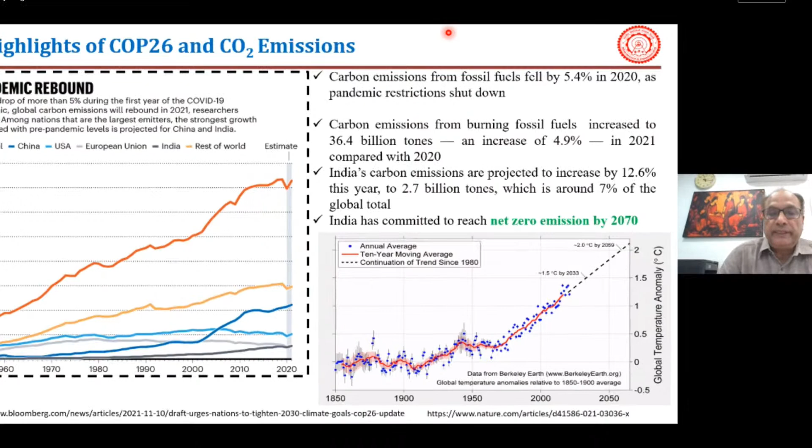So with some background, what Mr. Ashu already explained about these things - what happened in COP26 and then the COVID pandemic, and gradually the CO2 concentration, which is now around 410 ppm in the environment, makes the overall system very challenging. It has already been said that by 2070 it should be zero carbon. So how to do that? That's very challenging. And if you look at the data, the carbon emission from all these burning fossil fuels has increased to 36.4 billion tons, which is around 4.9% increase in 2021 compared to 2020.

So that's what the COVID impact has been, you can see there is a dip and then again a continuous increase in carbon dioxide in the environment.

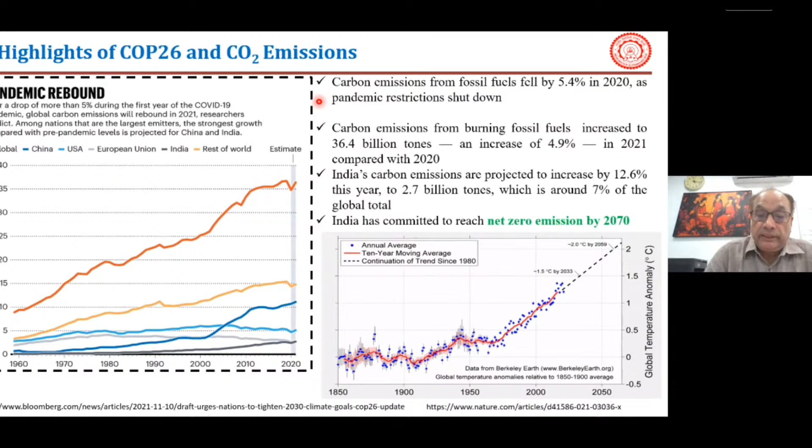If you look at India's carbon emissions, that is also projected to increase by 12.6% this year, reaching a level of 2.7 billion tons, which is approximately 7% of the global total. And India has already committed to net zero emissions by 2070.

And you see the consequence of the increase in carbon dioxide in the environment - the temperature is rising, and because of this there are several other complications that come up.

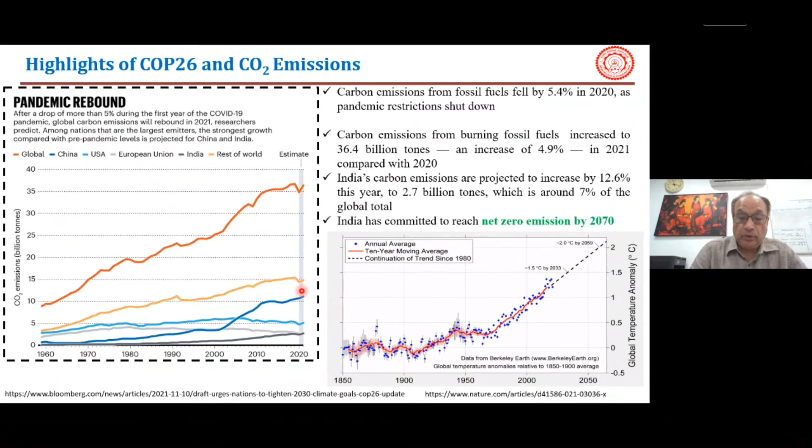So with this, there is a need to look at the non-carbon fuel based economy, and that's why we are talking about the hydrogen economy. I'll give a couple of glimpses of this - how this can be done and what are the challenges, which were the questions Dr. Ashu has already raised in the beginning of his introductory remarks.

So you see that the fossil fuel demand, and when you look at the energy demand, it is increasing continuously, and most of this demand, say in India, 90% of it is from crude oil or natural gas. And the temperature is increasing because of this carbon dioxide in the environment - approximately 1.5 degrees, which is expected to increase by 2033. So that's again a big challenge.

So therefore everybody is talking about how to reduce this carbon fuel. Hydrogen could be one of the promising fuels, or energy carrier, in future.

Whether it is the fertilizer industry, refinery, petrochemicals, or maybe the transport sector, hydrogen could play a major role, and that's why the hydrogen-based economy is coming up in a big way, whether it's from different kinds of feedstock - biomass, coal, natural gas, or some other sources. But there's a need.

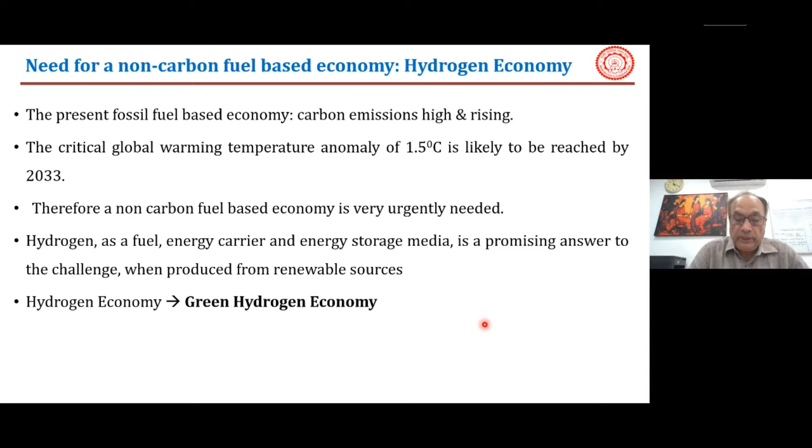But the future is again not in terms of grey hydrogen, what Dr. Asutosh has raised - it should be a kind of green hydrogen. So now the challenges are much more stringent in order to make this possible.

So again, you see the demand of hydrogen - because it's one of the fuels widely used in refineries, petrochemicals, iron and steel, chemicals - so everywhere you see the demand is increasing continuously. So it's not a linear growth of hydrogen demand, but rather exponential.

And this is not including the transport sector. When you look at the application of hydrogen in the transport sector, this is going to be much higher. Indian demand in terms of these chemicals is around 6 million tons in 2020, mainly for methanol, petro refining and ammonia.

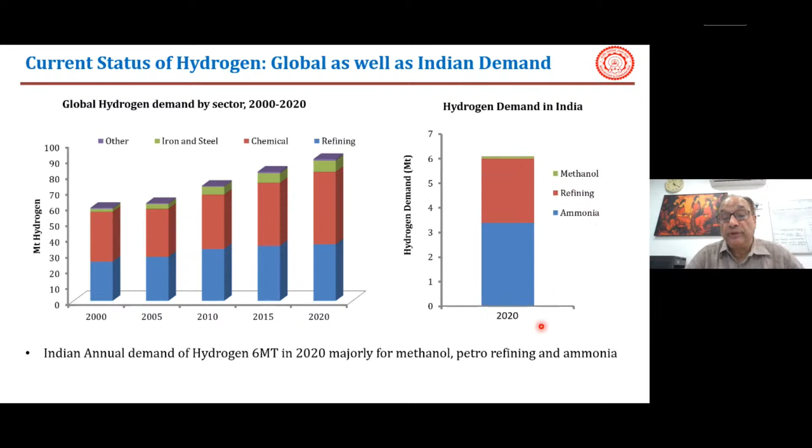You see the numbers again here - the refinery and fertilizer industry consumes a large amount of hydrogen. That is the current trend.

If you go globally, how is hydrogen produced? Because it's mainly being used by refinery and petrochemicals, not for the energy sector, or only a very limited fraction is being used by the energy sector. So you see that most of the hydrogen is being produced from natural gas, through steam reforming of natural gas, as everybody knows.

A very small fraction - if you see, 196 million tons of oil equivalent of natural gas produces around 69 million tons of hydrogen, and a very few fraction of that is through carbon capture and utilization.

Because when you talk about the concept of grey versus blue versus turquoise hydrogen or green hydrogen, this factor also becomes important, because if you capture the carbon dioxide, it will add to the cost of carbon dioxide capturing. So out of this, you see 38 million tons of hydrogen is consumed by the refinery, and 31 million tons is consumed by the fertilizer industry.

These are the small fractions which you see coming from different sectors, like byproduct hydrogen - there are numbers coming from there, but the fraction is very small.

So if you look at the global hydrogen demand as of today, it is around 120 million tons, and there is a continuous increase, with most of the hydrogen coming from natural gas. It is expected that this will grow to 200 million tons by 2030 and 530 million tons by 2050. So you can see what kind of exponential growth in hydrogen demand will occur in future, if everything is based on hydrogen.

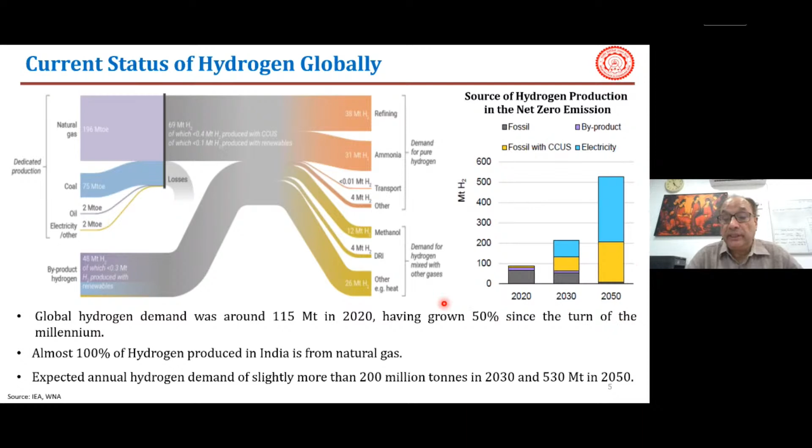But most of the fraction could come through electricity, or maybe the electrolysis of water. These could be future approaches for hydrogen production, but R&D still needs to be done to make this possible. So now you know a lot has already been done on hydrogen as a clean energy carrier, with multiple applications.

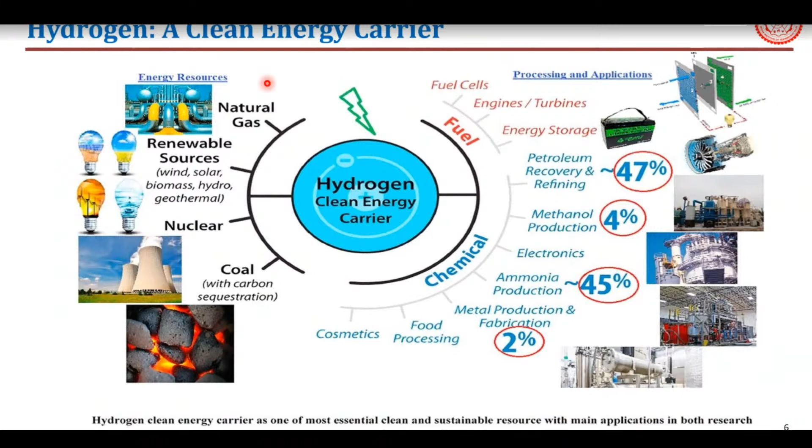As I told you, natural gas is the main feedstock for hydrogen production, but everybody is talking about renewable energy sources, geothermal, and nuclear energy as major sources for clean hydrogen. When we talk about green hydrogen, India has plenty of coal, around 160 billion tons of proven coal reserves. We need to look at this as a source too, but how to make it green? It's not green hydrogen, but how can you convert it towards turquoise hydrogen with carbon capture? A lot of work is being done by the Ministry of Coal in this regard, and that is also very important for the future.

Hydrogen has a lot of chemical applications like in petroleum industries for recovery and refining. Approximately 47% of hydrogen is utilized by refineries and petrochemicals. 4% of hydrogen is used for methanol production. This is still a low number because very low amounts of methanol are produced in India at present, and mainly it is imported from different countries.

So there's the coal-to-methanol concept already developed, or green methanol which can be from biomass-based feedstock. That's again a demand for the future. Hydrogen is mainly consumed by the fertilizer industry for ammonia production, 45% goes to the ammonia industry, with smaller amounts used in other industries.

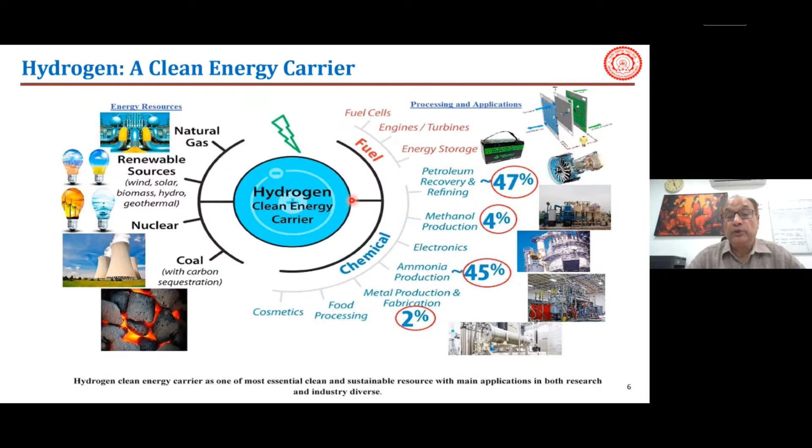But the future question is whether this hydrogen can be used as an energy carrier for transport or as a fuel. Fuel cell demand, engines and turbines, energy storage, battery applications - these are areas where the transportation sector is looking toward green energy, and hydrogen becomes very important in future as a source of energy carrier.

Everybody also talks about the color classification, because hydrogen isn't just about coal or natural gas reforming. That gives the kind of hydrogen generally sourced from coal or lignite based gasification process. But this is totally a kind of coal with a large amount of carbon, so it's a carbon-rich feedstock which is converted to hydrogen.

So what is the future of the carbon dioxide coming from there, how to capture that? That's a big challenge, and that's the issue with brown hydrogen, which cannot be utilized in future. The second one is gray hydrogen, where there are opportunities - natural gas steam reforming gives around 13.6 kg of carbon dioxide per kg of hydrogen.

So how to capture this to move it towards blue hydrogen? There can be opportunities where gray hydrogen is converted to blue hydrogen, through direct methane decomposition, which our group is working on with HPCL. In methane decomposition, you get carbon nanotubes and hydrogen, and that could be called turquoise hydrogen.

Another consideration is energy, because when you use reforming, you're again using energy either from fossil-derived feedstocks or electricity. If you look at the life cycle assessment, there are questions about how much energy input is needed and whether that energy is green, in terms of efficiency. If everything is done through solar energy, wind energy, and then you produce hydrogen, then it can be called green hydrogen.

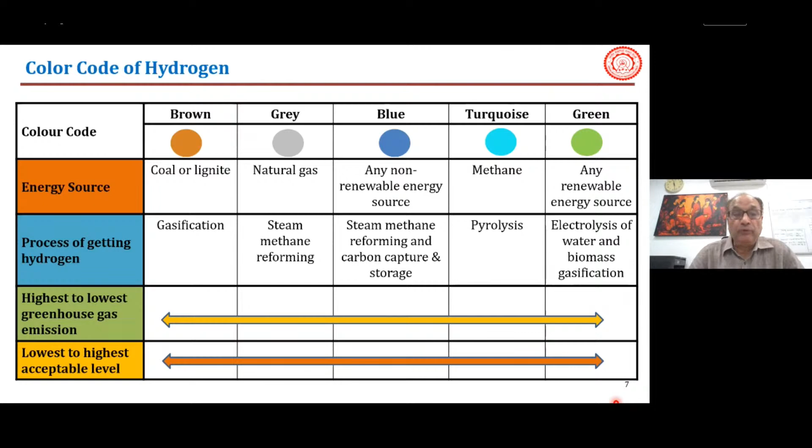So why are we talking about hydrogen? Not much needs to be said, but everybody knows when you use green hydrogen as a source of energy, it just produces water. Unlike diesel, gasoline, or other carbon based feedstocks where you have carbon dioxide and several other impurities which pollute the environment, hydrogen produces energy and water, and it's around 120 megajoules per kg of hydrogen - highest in terms of energy density also. That's a very important factor with respect to hydrogen. It doesn't generate any carbon emission.

Talking about hydrogen for low carbon products - hydrogen can be used wherever you have a high hydrogen to carbon ratio, and if you introduce more and more hydrogen, this is also important in terms of chemical production, right? That's very important. That's why hydrogen is very, very much in demand.

In general, from an emission point of view or a leak point of view, hydrogen is a safer fuel compared to LPG, natural gas, gasoline and diesel, but there is a lot of debate on this point. When it leaks, it directly goes up at high concentration, but you know it's explosive between 4 and 75% concentration - hydrogen is very explosive. That's a big challenge when you use hydrogen in vehicular applications. So one needs to find a solution, right?

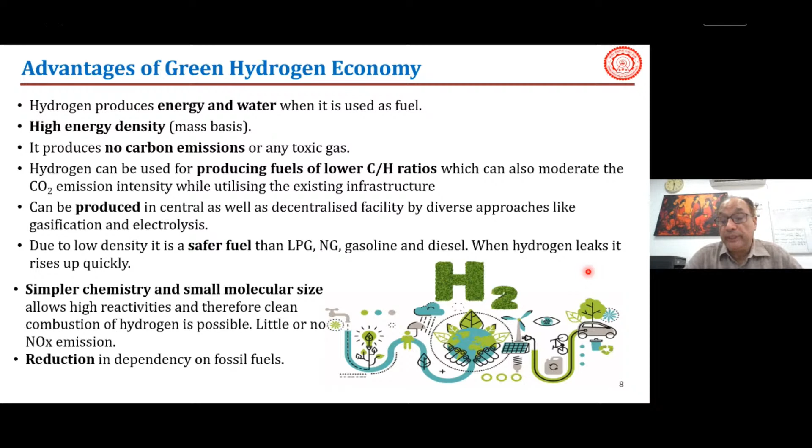The chemistry is very simple, and this is where hydrogen comes into picture. You see that with water electrolysis, you can have a tap, you can have a process by which hydrogen can be produced, and then you can drive your car. That's the vision for the future, or a kind of speculation for the future, which one needs to work toward. So hydrogen can be used as a clean energy carrier.

You see that it has the highest carbon-free energy - around 33.2 kilowatt hours, compared to any other energy source. That's a high number, and 30,000 kilocalories per kg, which is approximately 120 megajoules per kg of energy. So 1 kg of hydrogen, in terms of cleanness, is equivalent to 7 to 8 kg of coal - equivalent, without the carbon associated with coal - and it's also approximately equal to 3 kg of natural gas, or approximately 42 normal meter cube of compressed natural gas. So that's the advantage in terms of mass wise or volumetric wise for hydrogen.

Although volumetrically this number is a big challenge, because when you look at the kind of cylinder and pressure needed to store that much hydrogen, it's a challenge, and that is again where a lot of R&D is being done. Hydrogen can be extracted from water, or from hydrocarbons - fossil derived feedstock. It can also be from biomass, but again there's a challenge. A lot of R&D is being done in coal to hydrogen and biomass to hydrogen processes by capturing the carbon dioxide through this. So like electricity, this is also an energy carrier, and it's much more versatile due to its better conversion efficiency.

I'll discuss the efficiency of hydrogen combustion later. But in total, when you look at the utilization of hydrogen, it is a cheaper renewable energy. Hydrogen fuel cells are pushing hydrogen to central stage for the future, so a lot of research is being done on fuel cell demand.

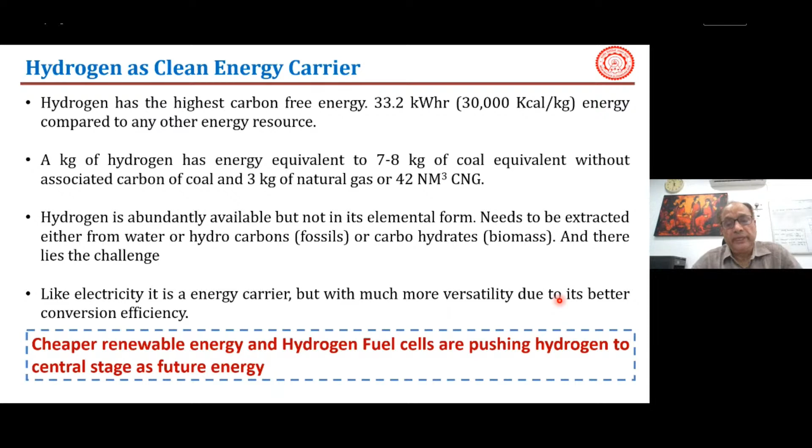So 5 kilowatt based fuel cells, or PEMFC type fuel cells, where methanol can be used and act as a hydrogen carrier. Or simple natural gas can be reformed, provided the hydrogen can be captured and carbon dioxide can be captured using a separate technique, and hydrogen can be used for fuel cell applications. These plate and frame type heat exchangers can have the reforming, put a membrane, so carbon dioxide will go on one side and hydrogen can directly be used in the fuel cell application or directly in IC engines.

So application-wise, when you talk about hydrogen as an energy carrier, in the form of electricity and several other applications - these are fuel-based production, whether methane reforming, biomass, or coal gasification. This hydrogen can be used to power fuel cells, hydrogen turbines, and combined heat and power cycles, which can generate electricity, and then power-to-hydrogen. So this is a kind of complete cyclic loop.

So when you look at this concept, we are looking at green hydrogen, where for this complete cycle, thermodynamics is very important when you look at the exergy analysis. The storage of hydrogen requires pressure vessels. This can be used in industry, like direct reduction of iron, using hydrogen instead of coal, directly in the steel industry.

In fuels, like fertilizer, methanol is coming up in a big way, so hydrogen is required, CO2 hydrogenation is required, CO hydrogenation is required. So syngas to methanol, dimethyl ether - these are again a kind of energy storage device, or ammonia, which is also a green form of hydrogen storage. And this is the future - how to utilize hydrogen in transport like cars, trucks, buses, trains, and marine applications, where a lot of R&D is being done, in shipping and aviation.

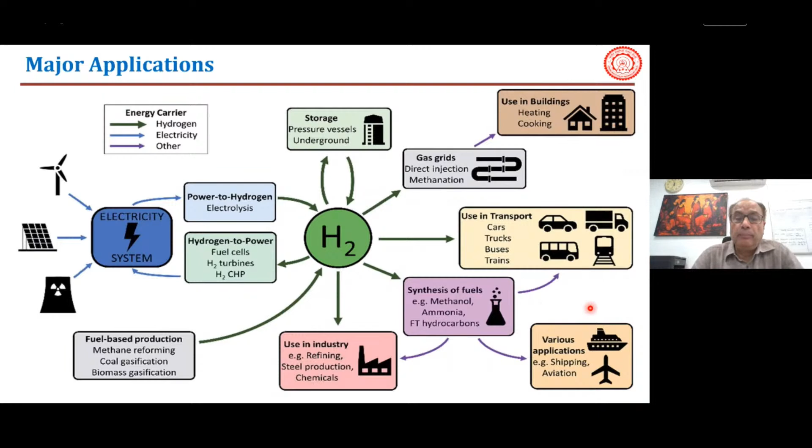So there are plenty of applications of hydrogen in terms of its advantages, but there are a lot of challenges too. As an energy carrier, the gravimetric energy carrying capacity of hydrogen is around 33 kilowatt-hours per kg, compared to natural gas which is only 9.3, gasoline 11.62, coal 5.23, biomass 4.2, and battery is still low at only 0.25 kilowatt-hours per kg.

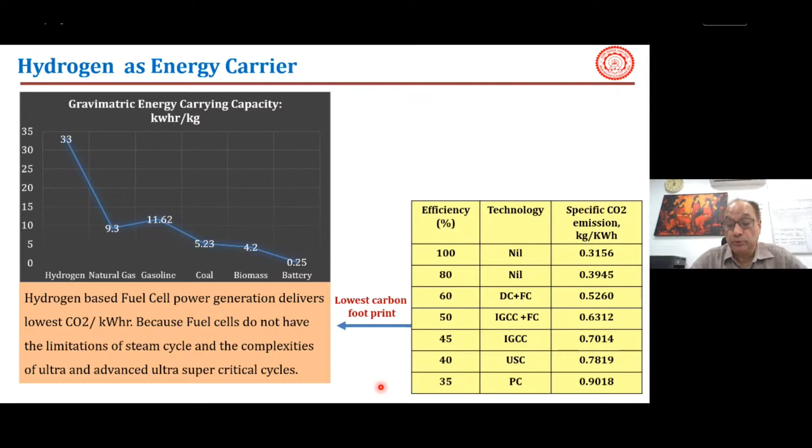So market demand wise, if you look at coal, crude oil, natural gas, these all are the feedstocks, or fossil derived feedstock, for hydrogen production. If you look at the demand in terms of oil equivalent, coal demand is around 430 million ton per annum of oil equivalent, crude oil is 250 million ton per annum, and natural gas is 130.

But when you compare it with respect to hydrogen, this is the current demand. If you fulfill the demand by green hydrogen, replacing all this, only 143 million ton per annum of hydrogen will be required. For crude oil, 250 is equivalent to 83 million ton per annum, and natural gas is 50 million ton per annum. But you see on the extreme right, how much carbon dioxide can be saved if hydrogen is used as a fuel.

So this is a huge number. 1,625 million ton per annum equivalent CO2 saving due to the replacement. That is where we are looking for the future, a net zero carbon emission.

So it means from all these kinds of feedstocks, either the carbon dioxide has to be captured efficiently and converted, or you go to hydrogen sources which can directly replace these fossil derived feedstocks, and then this can be a concept where you see net zero carbon emission. So this is still a hypothetical number which is written here.

If the current demand of all the fossil fuels like crude oil, coal, natural gas is replaced by hydrogen, you need around 276 million ton of hydrogen to complete whatever the industrial and chemical production demand requires. So that is a challenge for here to 2035, how the carbon dioxide can be captured, and finally to a mission of 2070 where it has already been decided for net zero carbon.

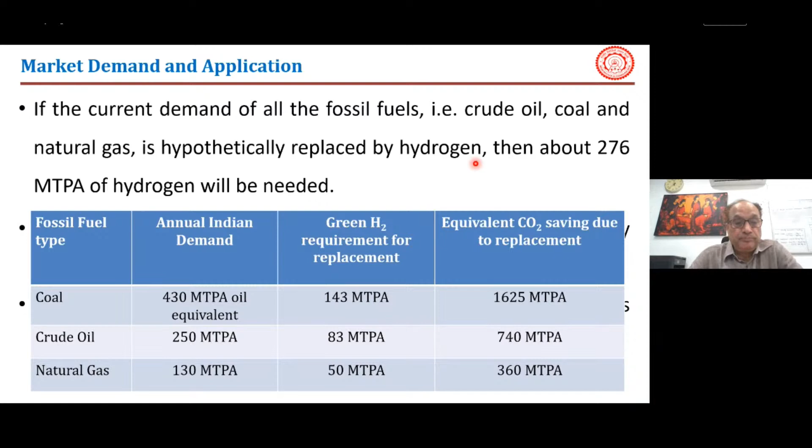So now when you see the energy utilization in terms of hydrogen production, hydrogen fuel cells deliver the highest efficiency from fossil fuels. Everybody already knows this part. Hydrogen from renewable plus fossil plus biomass will power the home around 1 to 5 kilowatt scale. These things are already being developed and have been developed.

But efficiency, you see here, it is 50% fuel cell efficiency. There is a need to boost it to 75% efficiency, which I said. So 50 to 60% is available. But this is important because we are talking about clean energy, we are also talking about energy saving, and a lot of things are to be done.

So you see here, different kinds of feedstock like methanol, biomass, all these are used as a feedstock and used in a reformer. We produce hydrogen and that hydrogen is used for the fuel cell stack, which can be AC type or DC type. So 50% is the efficiency of this kind of cycle, which is already being done.

But what we are proposing here is that methanol from coal plus hydrogen coming from renewable feedstock, whatever is rejected here, because 50% is rejected here, that heat should be absorbed by a vapor absorption machine, heat pump, and then sent back for some other purpose. With this, an additional 25% efficiency can be recovered, so that could be in total 75% efficiency of the combined cycle, and that should be the target for the future.

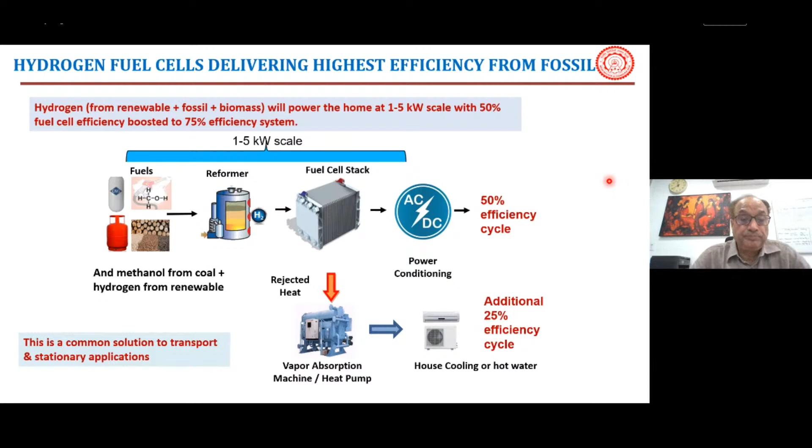So that is where these fuel cells need improved efficiency. That is to be done in future. Lots of things are there, if you say what is the present scene and what is the future to be done.

So future is with hydrogen, and for all applications, instead of using coal, natural gas or biomass, we have to look at whether the electricity grid, heat network, everything should be driven by hydrogen in future. That is where we are talking about long distance transmission and distribution systems that leads to loss, how these losses can be minimized, and large size refineries which manufacture liquid hydrocarbon fuels from crude oil, that is to be minimized.

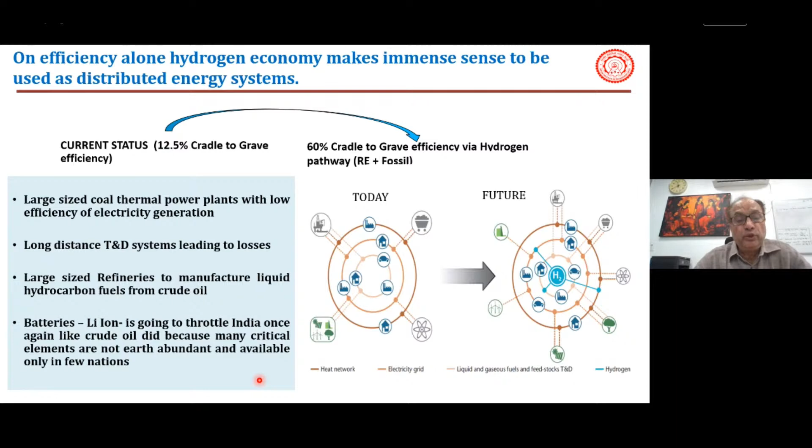Battery, lithium ions, these are also coming up in a big way, so a lot of electric vehicles have come. That is again, when you see the efficiency wise, there are a lot of challenges with that. So many critical elements, because lithium is not available, and this is available only in selected countries. So we need to find out the solution for these along with hydrogen production.

So why to use this, and what are the drivers for hydrogen production? That's very important because we are talking about hydrogen energy, but where will this hydrogen come from? How can this hydrogen be produced as clean hydrogen? Storage and transportation is a big challenge, and distribution of hydrogen is again a big challenge. So these are the major challenges to be addressed when we have to utilize hydrogen.

As a future energy carrier or energy source, so you said that hydrogen production presently comes from fossil and renewable sources. Both should be used. We cannot say that only water electrolysis will work or only biomass will work. We have to look at the fossil demand also because these are available in plenty. The only thing is how to make it clean, which is very important. This is a big challenge.

In fact, when you look at hydrogen production, one thing is to simultaneously utilize it, but for utilization, like in a power or electricity grid where you store the electricity, similarly for hydrogen, there should be devices for storing it.

So hydrogen storage and transportation, both in pure form or as a carrier. Ammonia could be one of the hydrogen carriers, methanol can be one of the hydrogen carriers. So those things are also important.

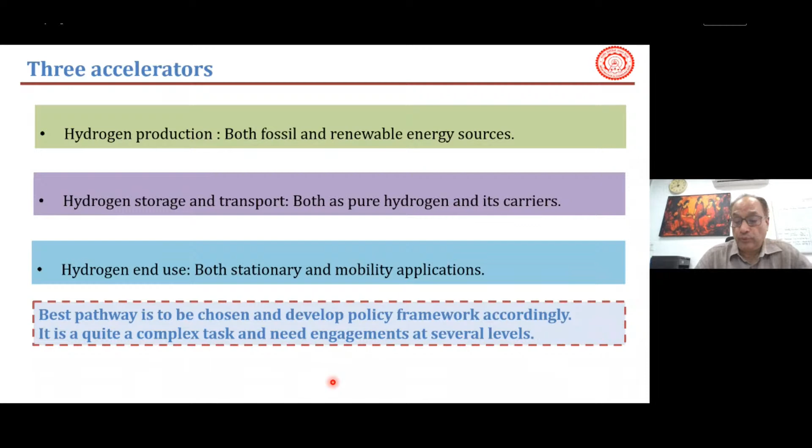And then application of hydrogen, whether for stationary application or mobility, mobile applications, direct or indirect. So all these things are drivers for hydrogen energy as a source in future. The best pathway is to be chosen and a policy framework developed accordingly. That is where all these energy sectors have to work with the development of these kinds of policies, and a couple of organizations are already working on this, and hopefully we will have a solution. So briefly, I will cover certain points on hydrogen production, transportation, and storage.

So this is the production challenges. Everybody is talking about green hydrogen, a decarbonized energy. This is green hydrogen by water electrolysis, but it's still a dream. It has not come to that level because cost and other energy factors are very important. So we'll discuss that part.

Natural gas steam reforming is well known, so there is no issue, and this is gray hydrogen. These color codes have already been defined. Coal is a kind of hydrogen which is called brown hydrogen. Nobody would like to go with this. But if you do coal gasification followed by carbon capture and storage, you can reach blue hydrogen. A lot of R&D has already been done in this direction.

So coal to hydrogen or coal to methanol gasifiers have been designed with a high hydrogen to CO ratio, and then again carbon dioxide capture. So those things are being done. The Ministry of Coal has already taken the lead in this direction, and a couple of these coal to hydrogen projects will come soon.

And finally, electricity from the grid, that is again very important, how to produce this electricity from solar, wind or other devices and generate electricity that can be used for hydrogen production. So that's again a future direction. These are a couple of areas.

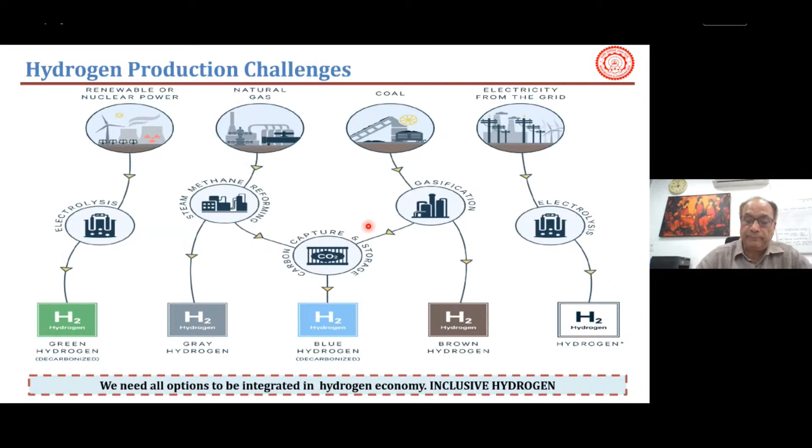But we need to find out the options which can be integrated into the hydrogen economy, and that's very important. All these processes are important because it depends on the availability of natural gas and coal, since India has available coal resources that can be utilized for hydrogen, but carbon dioxide capture is very important.

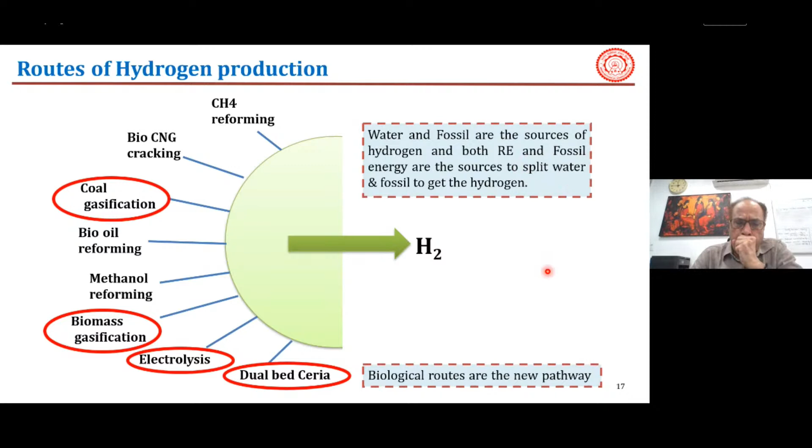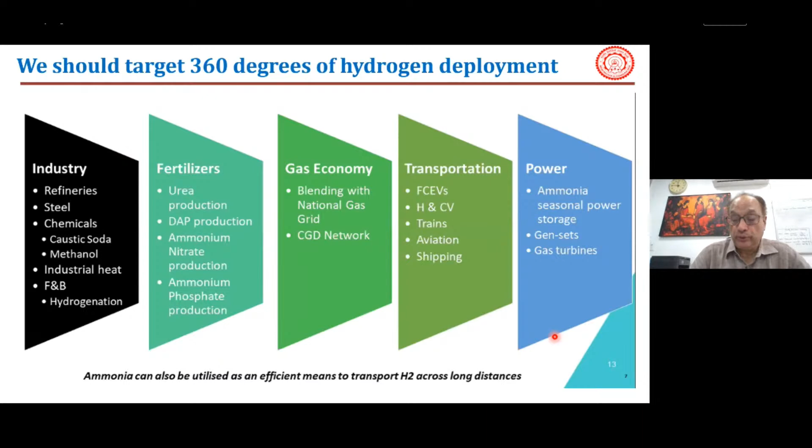So natural gas based hydrogen versus ammonia can be used as a source of hydrogen also for storing the hydrogen. Gas economy, so blending with the natural gas grids, all these grid based networking for electricity generation. Transportation is very important. When you utilize the hydrogen, fuel cell based hydrogen commercial vehicles, trains, aviation, shipping, and power, ammonia, seasonal power. So that is where we need to look at a kind of 360 degrees shift in terms of hydrogen utilization by industry or transportation sector.

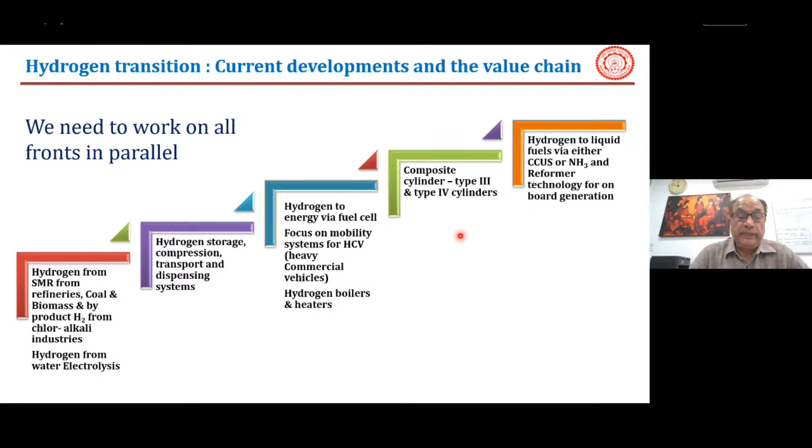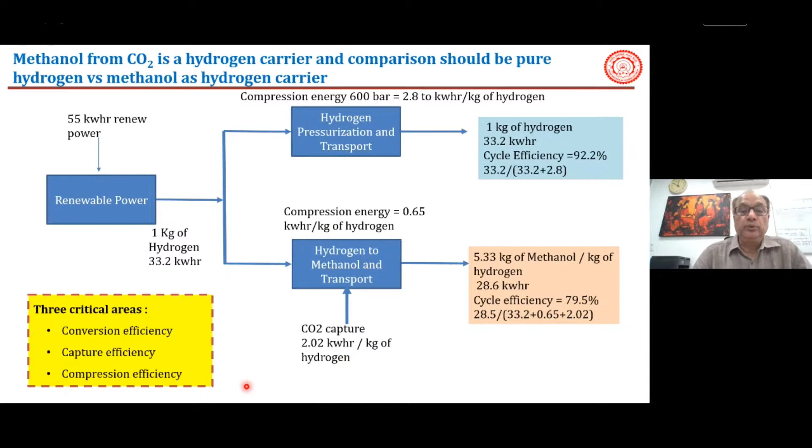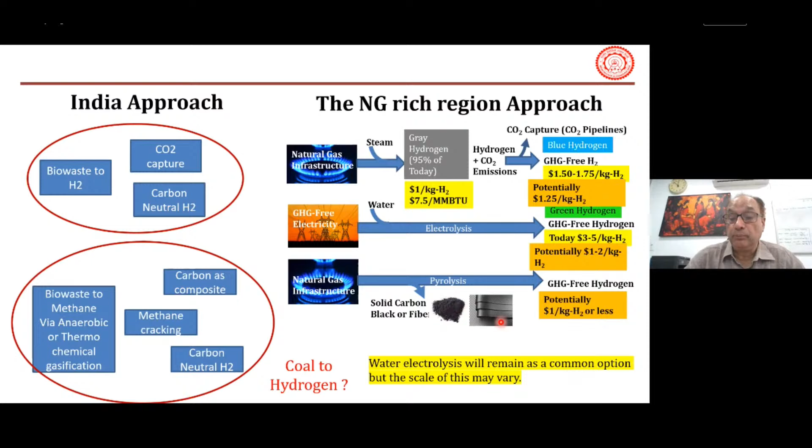Water electrolysis is still costly - you see $3 to $5 per kg of hydrogen through electrolysis, but with more R&D this can be brought down to $1 to $2 per kg of hydrogen. There's also potential with direct decomposition, which can reach around $1 per kg of hydrogen or even less, giving solid carbon as a product. But this is still at the R&D level.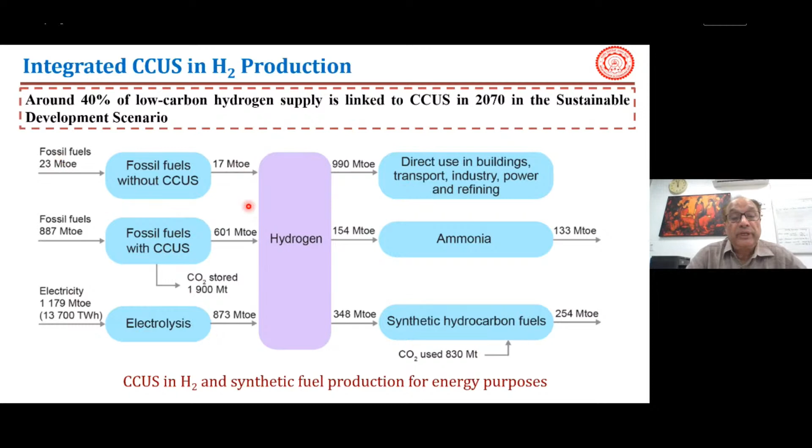But you see that hydrogen, which is generally used directly in building, transport, industrial power, around 990 million tons of oil equivalent. Ammonia industries use around 133 million tons of oil equivalent, and synthetic hydrocarbons. So this is a kind of speculation of how much equivalent hydrogen will be required in future, looking at fossil fuel with or without carbon capture and electrolysis. This shows the need of hydrogen in future, and that is required.

Similarly, biomass to hydrogen is again coming up in a green way. Biomass to hydrogen is basically clean hydrogen, or we can call it blue to turquoise hydrogen, provided the energy used is from solar, wind, or some other sources. Otherwise this can become totally green also if a complete life cycle assessment is done on the biomass and carbon dioxide is captured.

So these technologies are already known, coal to hydrogen is well known. But biomass to hydrogen, tar is a big problem. This tar is to be captured by some liquid based absorption techniques, or by adsorption processing. So a lot of things are being done here.

So you see biomass, and you can have oxy-steam blowing biomass. This is the kind of technology we are presently working on. Oxygen and steam gasify at around 800 degrees centigrade, and you get the gas. You remove the ash, cool it, absorb the tar, and then there are some gas cleanup processes. I'm not going in detail of this. Then you can have a water gas shift reaction to tune the hydrogen to CO ratio, so you can have hydrogen here with this.

So that hydrogen can be used by compression and storage. This is the R&D where we are looking at 1 kg hydrogen per day at our IIT campus using biomass. 1 kg of hydrogen can be produced from 12 to 15 kg of biomass, depending on composition. Mainly cellulose and hemicellulose rich biomass, then only 8 to 9 kg of biomass will be sufficient. If lignin is there, then the amount can go to 20 kg also.

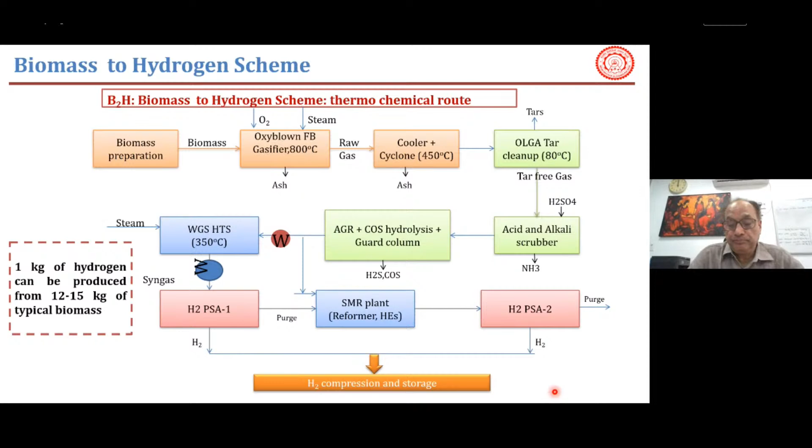So we have coal to methanol, which is already set up at Thermax, and this plant is continuously running for methanol production. We are using high-ash Indian coal here, and this is the optimized gasifier where oxygen and steam is used as a gasifying agent.

We did a lot of hydrodynamic study to design this gasifier, and this is the gas cleanup system. There's a lot of impurity in high-ash Indian coal, so the impurities were cleaned up by the gas cleanup island. Then we worked on some catalysis also, and then we worked for CO2 conversion because a lot of carbon dioxide is coming out, converting carbon dioxide to methanol and dimethyl ether.

That's a separate project, and this is where the hydrogen can be stored by pressure swing adsorption. This is a typical blueprint for hydrogen production at 1 ton per day scale. We are also working with GAIL on carbon dioxide to methanol and dimethyl ether, on one of the projects where we are working on utilization of carbon dioxide.

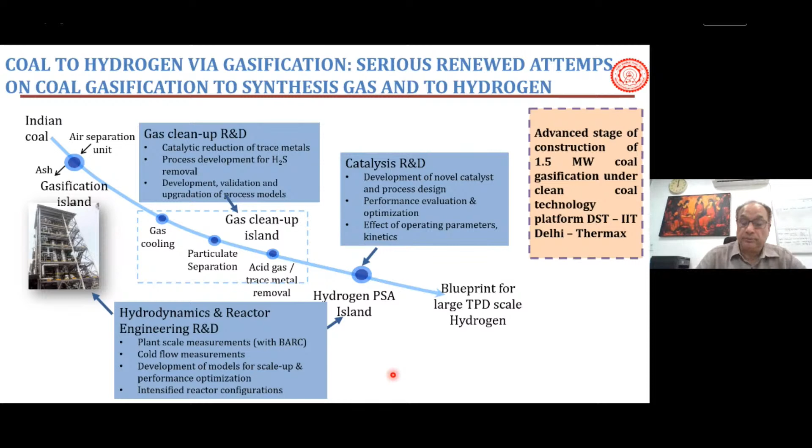So there is a huge opportunity when you look at biomass or Indian grade coal, and this is something already supported by the Department of Science and Technology. This 1 ton per day demonstrable plant is running in Thermax successfully. A lot of things are being done by different researchers on these renewable energy pathways also.

This is again the future, right? When you look at water splitting, or sea water, brackish water, although there are a lot of challenges because of water quality. So you need to use deionized water for this, and then electrolysis, and you can have the green oxygen. You can use this oxygen for some other purpose, and then you get green hydrogen, which is 99.999% pure.

So the renewable energy can be used for this purpose, and green hydrogen can be converted to ammonia also, to store it, because storage of hydrogen is still a challenge. So either it is a green hydrogen application for oil refinery or all this heavy transportation, steel plants, gas networks, or green ammonia, then green applications like fertilizer, industrial use, energy storage - all these can be used.

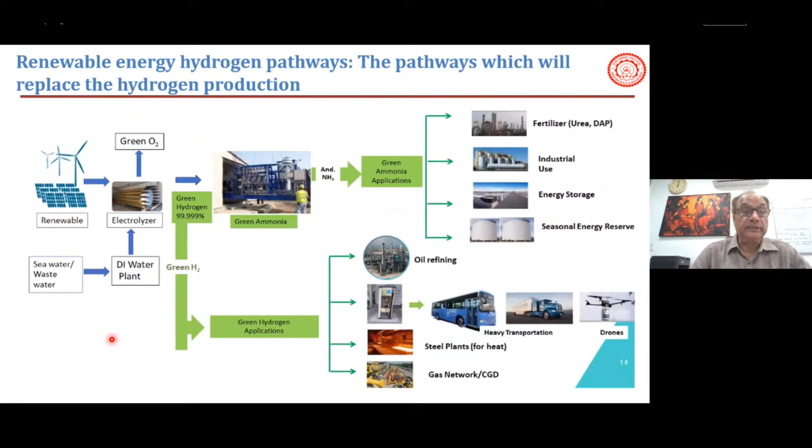So that is again a lot of R&D being done, a lot of things already developed by different researchers. So hydrogen from water electrolysis is a challenge, in fact, when you look at the efficiency in terms of energy, it is totally a green process. But you see the technology here - the anion exchange membrane technology is being used.

The process which is used - the feed required is pure water at 60 degrees centigrade. The charge carriers are the membranes, anion exchange membranes, by electrolysis, so hydroxyl and water, and the product is pure water and hydrogen. The power required is more than solid oxide electrolytic fuel cells, or SOEC electrical. All these kinds of applications can be done using SOEC or SOFC to produce the same amount of hydrogen.

So generally the differentiator here, if you look at 4.8 kilowatt hour per normal cubic meter of hydrogen, that is the produced output at 35 bar. So that's the efficiency of this process.

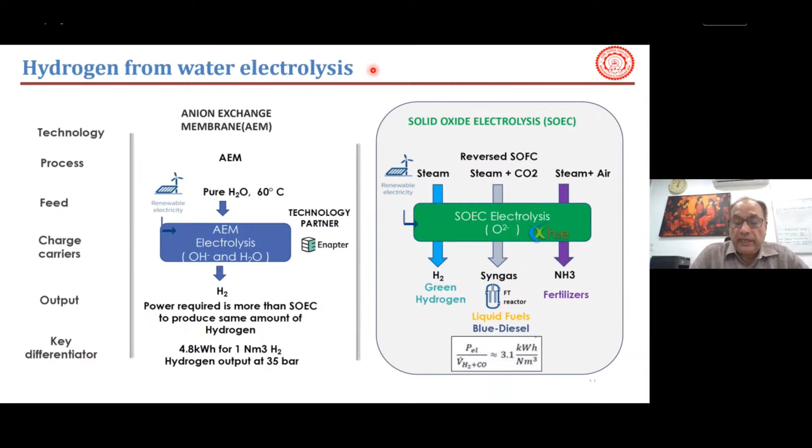When you see the right hand side, the solid oxide electrolysis, which is generally done as reverse solid oxide fuel cells - you can have steam plus carbon dioxide, and you use this for electrolysis. So you can have green hydrogen, you can have syngas for the FT reactor, you can have ammonia. But this is still at R&D level for commercial application. A lot of things are still to be done.

The methods are there, but when you compare the process and the cost, that becomes a challenge. Generally, we target 120 rupees per kg of hydrogen. Methane reforming gives around 130 to 250 rupees, depending on the natural gas cost, and also in terms of the carbon capture.

This is already a commercialized technique for methane reforming. Biomass gasification is generally 140 to 260, again a wide variation in cost - about 1.5 to 4 rupees per kg of biomass for the gasification cost. This is still at the proof of concept stage.

The hydrogen yield from this is reasonably good, around 10 to 20%. Bio CNG cracking costs around 200 plus rupees, and again this is a kind of concept - methane cracking has been done, but not at commercial scale. Most of the CVD work has been done for carbon deposition, but methane to hydrogen cracking is still early stage. A lot of things are yet to be done.

Coal gasification hydrogen costs go up to 260 rupees per kg, depending on coal prices, and this is already commercialized, with a hydrogen yield of 15 to 20%, so that's on the low side. Bio-oil reforming is 250 rupees, and again the hydrogen yield is low.

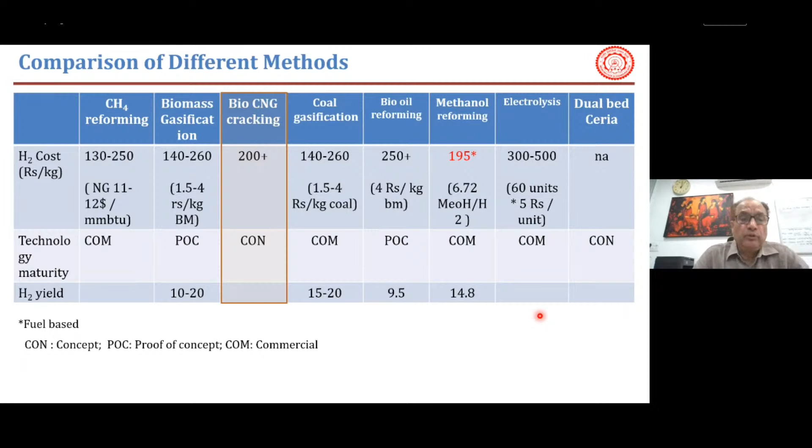There are a couple of new areas, like dual bed ceria-based methods, which are not available yet and are just on a concept basis for reforming or production of hydrogen. So these are the major methods when you look at hydrogen production and cost in terms of energy equivalent.

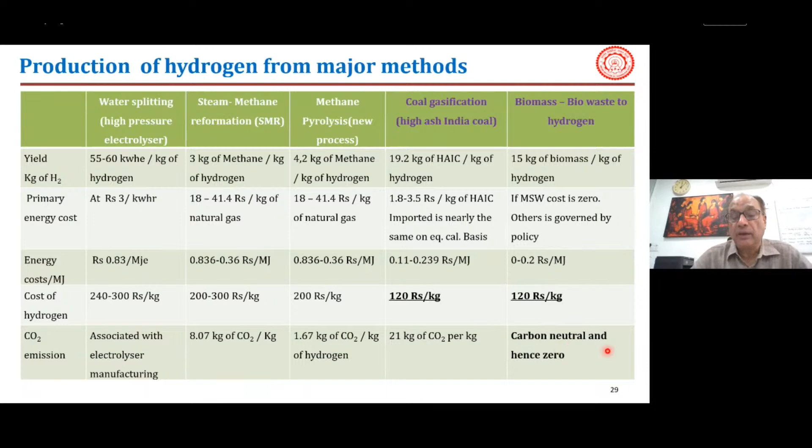But carbon dioxide has to be captured. With some methods there's no carbon dioxide, but here you have to capture 21 kg of carbon dioxide per kg of hydrogen produced, so that's a problem. Biomass, in one way, is carbon neutral, so it can be utilized as a source of energy.

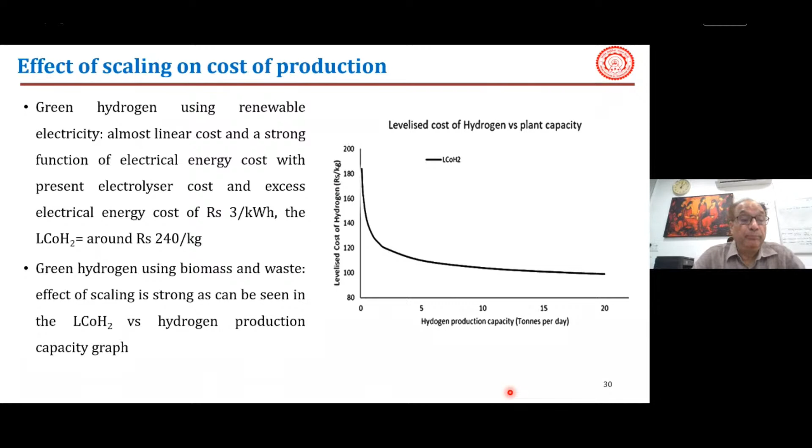So when you increase this, the cost will decrease. That's again the levelized cost of hydrogen versus the plant capacity. That's the important factor, how one can utilize these things.

I'm not going in detail on the unit cost of hydrogen production, but it's important to note the different supply pathways, whether steam methane reforming, petroleum coke gasification - Reliance is doing a lot of work on petcoke gasification and water gas shift for hydrogen production, coal gasification, and biomass gasification.

Looking at production capacity, with green hydrogen there's no storage needed - you can directly use it for trucks, rail, ship, or pipelines for transport. But if you're using compression, then you need energy all the time, whether for internal combustion engine, fuel cell, or electricity. So storage, transportation, refueling, and utilization are a big challenge when you look at hydrogen as an energy carrier for transportation.

Most of the time when you produce hydrogen from these sources, you have to store it either in cylinders in compressed form, or use cryogenic conditions, but there's always a cost. If you're not storing, there's no cost, but in other cases - compressing, converting to liquid hydrogen, or metal hydrides - there's a cost involvement, and that becomes a challenge.

Then transportation in liquid form, compressed form, or metal hydride form by trucks is a cost-involving factor. By rail, again there's cost involvement. And when you compress the hydrogen and refuel it, again cost is involved. So all these are very important and challenging when you look at hydrogen utilization for transportation, storage, refueling, or any commercial application.

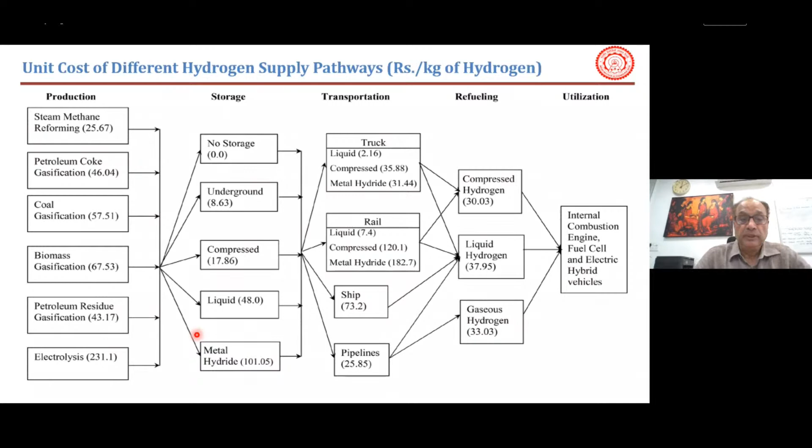A lot of things are being done. The transport sector is using several available technologies, with fuel cell electric vehicles either using hydrogen in molecular form or as methanol, ammonia, or dimethyl ether to operate fuel cells. Toyota, Tata Motors, BMW, and others have these kinds of fuel cell electric vehicles and hydrogen-based electric vehicles. There are buses also available.

IOCL has also done a lot of R&D on this, and hydrogen plus methane based buses, what's called hythane, are also available, which were already planned for Delhi.

For fuel consumption in a car, hydrogen produces no CO2 compared to gasoline which produces 3 kg CO2 per kg fuel, diesel 3.11 kg CO2 per kg fuel, and natural gas 2.75 kg CO2. Hydrogen also gives better mileage at 130 kilometers per kg compared to other fuels, and grams of CO2 per kilometer is 0 with hydrogen compared to others. These are important points for thinking about where hydrogen should be used in the future.

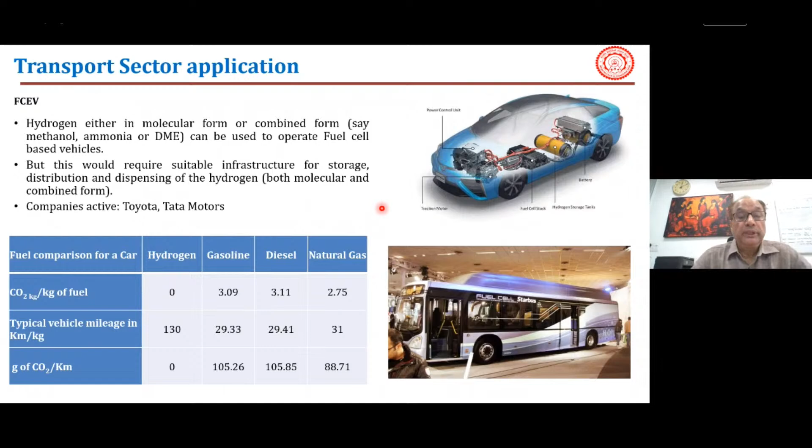IOCL has developed India's first hydrogen and hydrogen-CNG station at IOCL Faridabad. This is the first public hythane station - hythane being hydrogen plus compressed natural gas - where exhaust gas recirculation and hydrogen synergy can be used, which will definitely help capture carbon dioxide. There are a couple of things being done to utilize hydrogen.

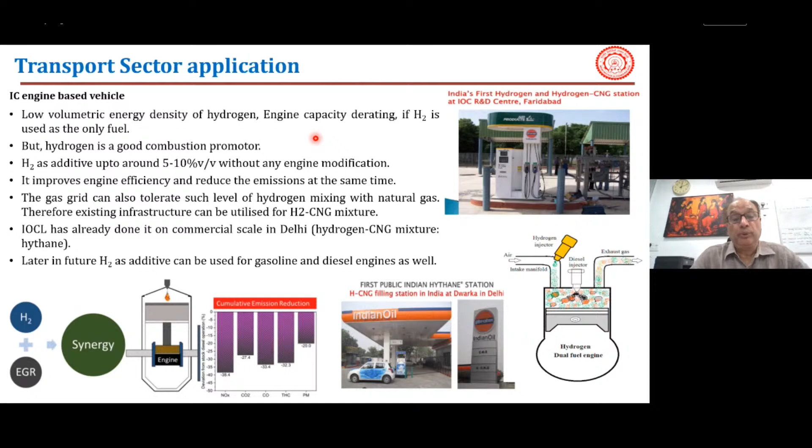There are dual fuels like hydrogen plus gasoline hybrid, hydrogen plus diesel type - some of these are at R&D stage and some are ready for commercialization, like the commercial hydrogen plus CNG mixture called hythane. With 80% methane decomposition, this mixture can directly be used for vehicular application. But online versus offline compression, storage and dispensing with proper safety are important considerations for the transport sector.

At the international level, marine applications are also seeing hydrogen-based submarines replacing diesel fuel, because diesel fuel is very dirty and expensive, but hydrogen can be used as an additive. These kinds of systems can also be used to produce power from fuel cells, and these techniques are being utilized.

Railways are also using hydrogen plus diesel or hydrogen-based fuel cells, on a trial basis along with lithium batteries. These combine fuel cells and fuel tanks where hydrogen is stored, then the fuel cell generates electrical energy by combining hydrogen and oxygen to drive the train - this kind of train has a range of around 625 plus miles, using ICE-electric traction motors. This is not being done in India yet, but globally in the world, these things have already been implemented.

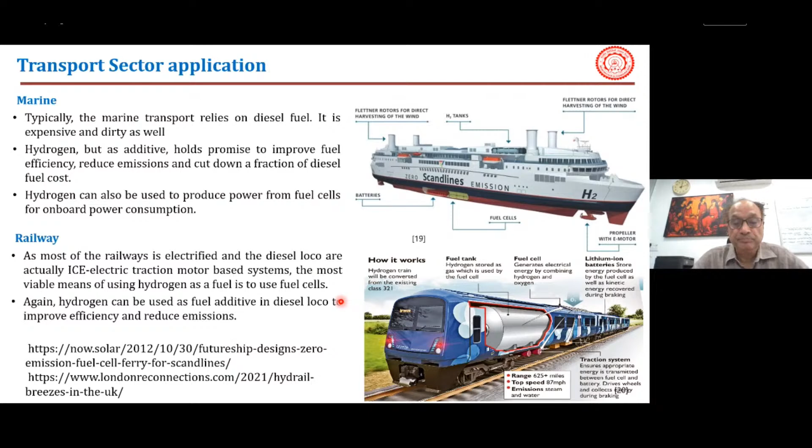So as was said in the beginning, how to address the challenges of hydrogen storage. A couple of R&Ds have been done, like mechanical storage. Hydrogen needs to be compressed at high pressure, like 700 bars, and you can store it. So those kinds of storage devices are there. Tanks design and pumping systems need to be specifically designed for hydrogen. High pressure means higher compression. This is being done at R&D level, and companies like Air Products have developed hydrogen storage tanks. The storage material is very important. So lightweight materials, composite materials, these are the need of the hour, which can be used.

Corrosion-free vessels are required. Lightweight materials are required because at least 6 kg of hydrogen is to be stored, whether under pressure or cryogenic condition, which will drive around 350 miles, 500 kilometers. That's the target, and after that you can refuel it. There can be cryogenic liquid storage tanks also, under cryogenic condition. Liquefaction of hydrogen will be required at -253 degrees centigrade. So what kind of material will be used here? Those are again the challenge.

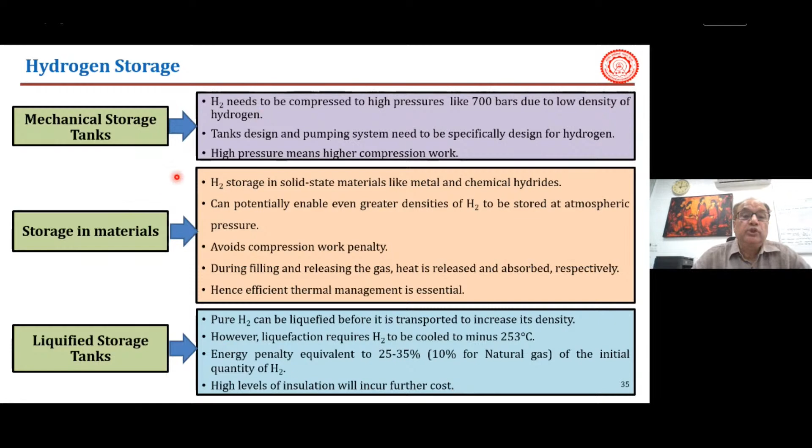The energy penalty is equivalent to 25 to 35%, equivalent to 10% of natural gas of the initial quantity of hydrogen. So these are the challenges which need to be addressed for storing and transporting hydrogen.

A lot of things are being done at R&D level. How can we store hydrogen? Physical storage like compressed gas, cold or cryogenic liquid hydrogen, or material-based storage. A lot of R&D is being done in this area, as an adsorbent, as liquid organic, interstitial hydride, metal hydrides, complex hydride, chemical hydrogen. All these are being used.

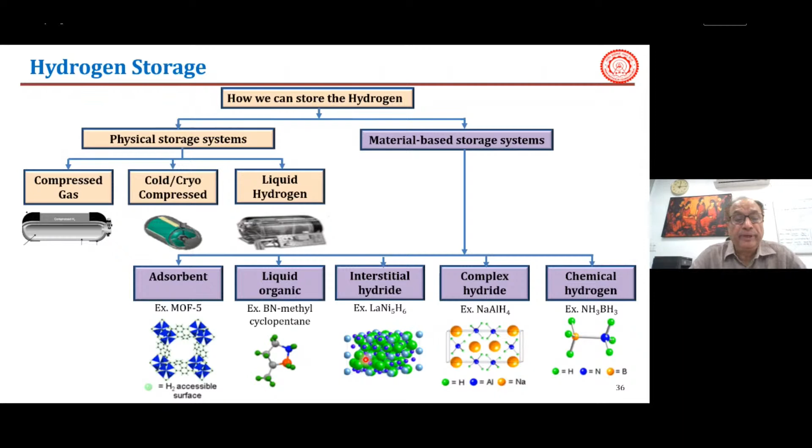But as I said, 6% is the requirement of storage. These materials have 3 to 4% so far, so that's again a challenge. How to increase this number to a level of 4 to 6%, so that the driver can run at a minimum of 500 kilometers before recharging or replacing these kinds of adsorbents. A lot of things are at R&D level. Metal organic frameworks, covalent organic frameworks are coming up in a big way to work on that.

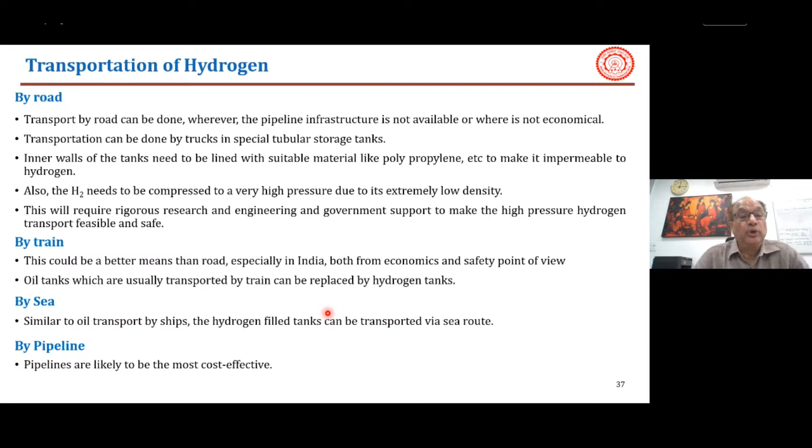Transportation can be done by road, by train, by sea, by pipeline, but these are still challenging because hydrogen under cryogenic condition is very brittle. You need to look at how that temperature, -200 degrees centigrade or -253 degrees centigrade, or very high pressure like 700 bar, can be handled when transporting large amounts of hydrogen by these materials.

So these are the major challenges when you talk about the green hydrogen economy. Safety - hydrogen has a high flame speed, wide flammability limit, and needs an extra safe approach for handling. These are the challenges when you look at the development of technology for utilization of hydrogen as a clean carrier. Simultaneously, these safety aspects should also be studied.

A lot of things are to be done, and very limited study has been done so far on safety of hydrogen, related disaster mitigation with regard to its handling. Industries have to come forward for this. No research has been done on long-term adverse health effects on people or animals in case of chronic or persistent exposure to hydrogen. That is also yet to be identified.

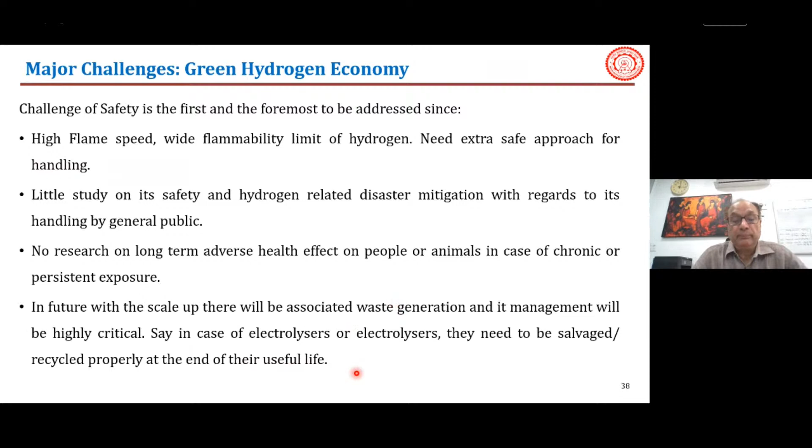In future, when you look at scale up, there will be associated waste generation, and management will be highly critical. That is also just like when we're talking about electrolyzers - they need to be salvaged eventually, their life is limited. Batteries, fuel cells, solar panels - their life is limited too. So when you look at the cradle to grave concept, that is also to be simultaneously analyzed - those kinds of devices, their life, and how to handle them in future when they are being discarded. So there are a lot of things which need to be done.

So I'm not going in details of this, but a lot of things are being done in order to produce green hydrogen, like renewable electricity and water electrolysis. These are at R&D level. BARC has done a lot of work on this, water electrolysis. Solar, wind, hybrid-based commercial electrolysis based hydrogen cost for India can be about 150 to 240 per kg of hydrogen.

That's the target, but presently it is very costly. Then green hydrogen using biomass and biowaste - we are also working at IIT Delhi, looking at a target of 120 rupees per kg. So decentralized versus centralized - when you talk about biomass, the waste generated in decentralized manners, how this can be transported from one point to another, whether it's biomass to hydrogen or biogas transportation and then use it. So a lot of these points are to be discussed in order to develop this hydrogen-based technology in India.

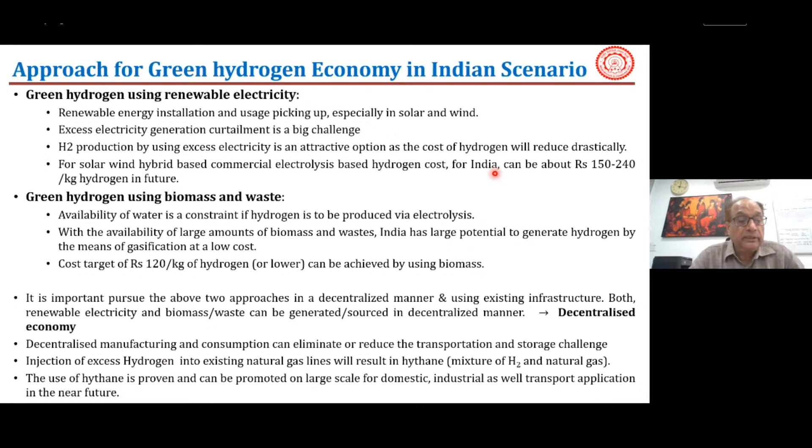These are a couple of examples showing that India is doing a lot of work. This is the work we are doing. BHEL is also working on this, CIMFR is also working on a similar approach - coal to methanol based technologies, and that has given a direction on coal to hydrogen. Methanol can be reformed, or water gas can be reformed, and you can have hydrogen, capturing the carbon dioxide, and that is where we are looking with a target. This can be utilized for fuel cell application.

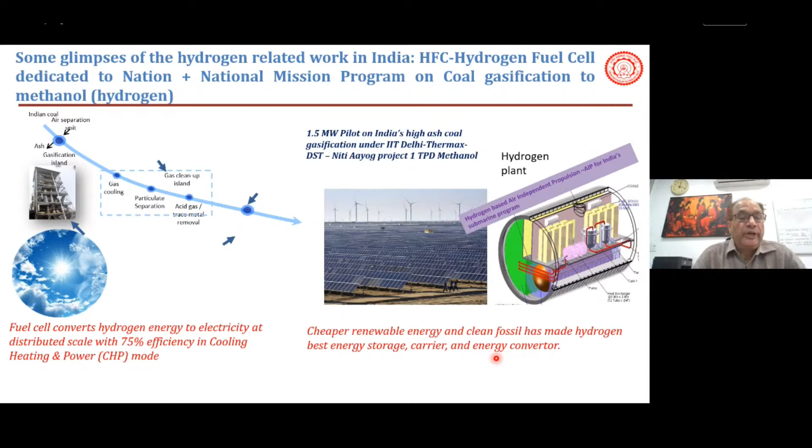There is a 1.5 megawatt plant on India's high ash coal gasification that Thermax is doing at Pune, and we developed a 1 TPD methanol plant, where you need to find out the cheaper renewable energy and clean fossil made hydrogen-based energy storage, carrier, and energy convertor. These are R&D level work, but the national mission program on hydrogen, coal gasification, methanol, and hydrogen as a source, ammonia - these are to be done for the future if you are really looking at a carbon neutral society by 2070.

So just at the end, because of the paucity of time, I am closing it here. India needs to carve its own pathway for renewable fuels, and this should be a kind of blend of hydrogen, which includes carbon dioxide capture and fuel cell based vehicles which can be used. If you use this, then we need to target 25 million tons of hydrogen production by the end of this decade. That is important because that is the demand - 6 million tons will rise to 25 million tons.

So 25 million tons hydrogen means 75 million tons of crude oil equivalent, and 25 million tons of hydrogen is equivalent to 100 gigawatts of electric equivalent. That's what we are calculating in numbers. And if you are able to produce 25 million tons of hydrogen, 800 million tons of carbon dioxide can be captured or saved. That should be the beginning in order to initiate this process.

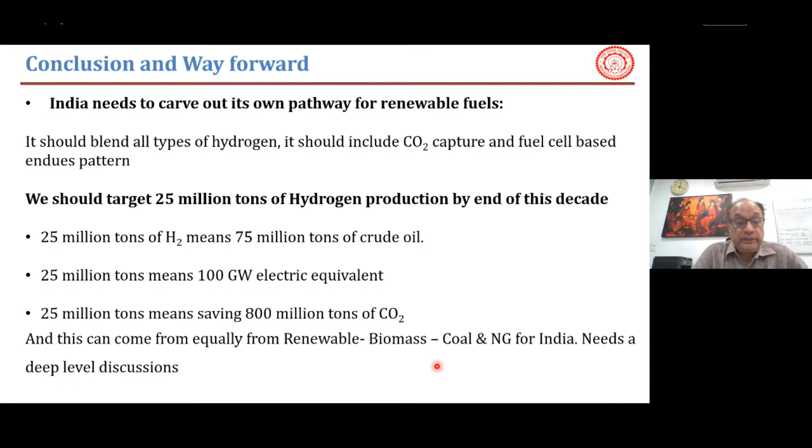At this point, this can come equally from renewable biomass, coal, or natural gas, and this needs to be developed - discussions are required. Lot of things are to be done. We need to develop demonstrable units, whether it's GAIL, Ministry of Petroleum and Natural Gas, or PCRA or Ministry of Coal. These organizations have to come forward to look at these kinds of demonstrable units, or a combined effort should be made.

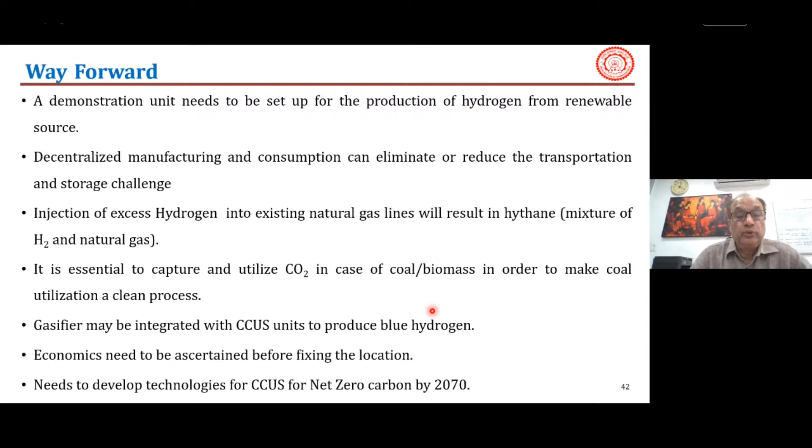Decentralized manufacturing and consumption can eliminate or reduce the transportation and energy storage challenge, and that is again important. Injection of excess hydrogen into existing natural gas lines will result in a hythane mixture - this can also be used. Refineries have to come forward, like IOCL has done, to capture the carbon dioxide from coal and biomass. Gasifiers need to be integrated with carbon capture and utilization to produce blue hydrogen. Economics need to be ascertained before fixing the location, and overall we need to develop net zero carbon by end of 2070.

So with this, thank you very much for providing me the opportunity, and if there are questions, I'll be happy to answer.